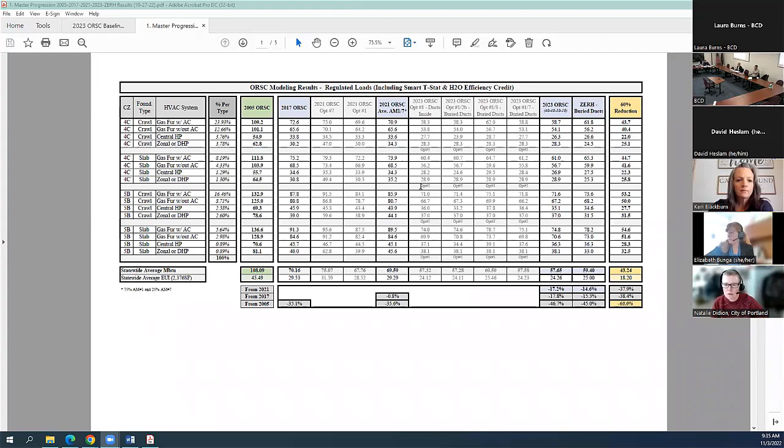That document, yes, if you could zoom in on that just a little bit to show our analysis of the models that we looked at for the progression of the code and sort of where we started from, for the 2021 code, and the agreements we've had on how we would look at modeling and looking at average energy use.

For the 2021 code, we modeled, just real quick to go through this, both looking at option 7, which was the Windows piece that is being deleted from the 2023 code. Results were significantly worse than that for the 2021 code using option 1. We developed an average result based upon an agreed upon weighting that we've talked with energy stakeholders on, assuming that 25% of homes might use option 7 and the remaining 75% wouldn't. So we came up with a result at the very bottom.

I know this might be hard for some people to see, is a statewide average regulated energy use of 69.59 MMBTUs per year for that home, for the regulated load. For the 2023 code, since we are moving, well A, getting rid of the option, and B, we're looking at moving ducts inside as one path, or still allowing deeply buried ducts to continue to be used, but requiring that second additional measure, we have on the screen showing 4 different potential options. The first one, of course, is just the standard home if the ducts were inside. The second, third, and fourth options are looking at 3 different potential variations of using an additional measure.

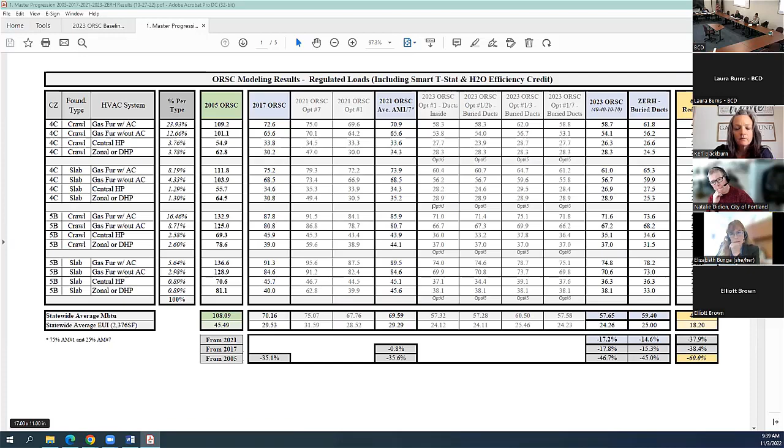There are things we get some additional credit for here in Oregon, just simply the 2017 version. We've had some additional pieces that came with doing this that get us where we see a safety factor, using the assumptions we've stated. I've had that spreadsheet available for people to look at for what we assumed for that ZERH buried ducts path, what that target is, and what we're assuming based upon the current code and discussions we've had so far. If we go down a page on this...

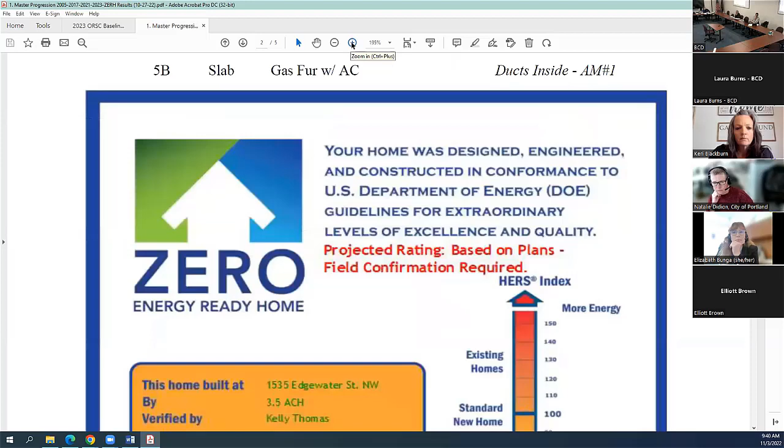Again, using REM rate, that is the software we've been using for the residential path. We can zoom in just a little bit on this. Pretty much all of them came out—actually, we've looked at even the worst case homes from the MMBTUs of the energy modeling of the different options, and when plugging in, they give you a 0 into REM rate, which is used for the Zero Energy Ready Home program. It will give you a passing score, including a HERS score, which we'll show as well.

If you scroll down a little bit more, to do the Zero Energy Ready Home program there are things done outside of what's in the building code. If you're actually going for full certification, you would do things for the Safer Living program, and additional indoor air quality items you might do if going through this Zero Energy Ready Home program. But from an energy standpoint, you take what is in the 2023 code. Every one of the ones we looked at will show that it's ready for the Zero Energy Ready Home program. If you want to scroll down a couple more pages, we can show some more that we did.

Zoom out a little bit—this one is for, and the one point of the Zero Energy Ready Home program outputs that I want to note for everyone is that REM-rate doesn't have an additional checkbox that would allow us to model a smart thermostat.

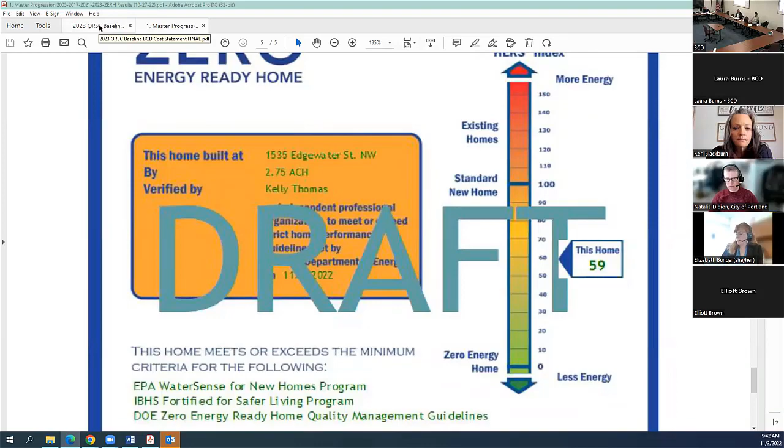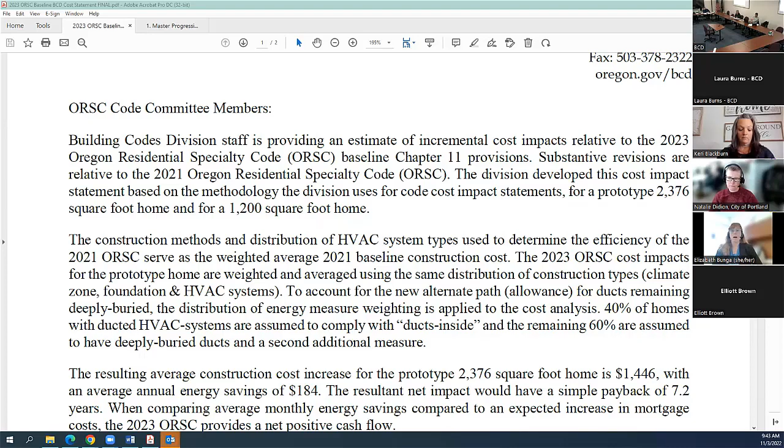Laura, if you could bring up the other sheet, this is our preliminary look, excuse me, it's not on current letterhead, at the expected cost implications of how we come up with the average cost expected statewide and the average energy savings statewide. The previous spreadsheet you saw is used to develop the average annual energy savings. We then take a look at what's involved in achieving the 2023 energy code, using the same assumptions used to develop the 2021 efficiency level, and identify the changes involved. We do a weighted average applying the expected cost to go from the 2021 to the 2023 code.

We have a general summary statement here. We're going to do a little more work on the 1,200 square foot home to really verify that when you change home size everything works out exactly correct. But we have good numbers for the 2,376 square foot prototype home.

All right. Thank you, Laura.

The average statewide cost increase impact would be about $1,446, and would return an average energy savings of $184 per year. Now those are using current costs, the best things we have available, and since we began this work and set up our standard for the numbers we'd use, we've seen an increase in the cost of energy as well. Next code cycle we'll have different numbers to reflect that. But the resultant net impact would probably be a simple payback of 7.2 years.

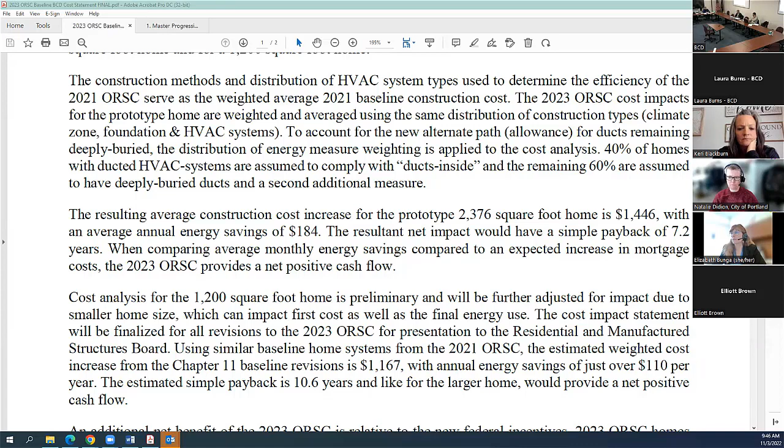But we want to make sure we've got all our ducks in a row on that one before we go to the board. Again, the 1,200 square foot figure is primarily for use of the RMSB in making their final determination. The final price included in that would include all of the revisions you'll be looking at, not just Chapter 11, but this specifically tells you about the Chapter 11 revisions.

If you can scroll down a little more, Laura, I want to point out that when you're building to the 2023 Oregon Residential Specialty Code and you produce a HERS report showing you're ZERH ready, you can also get Energy Star ready since that's even less restrictive. Reminder that there will be $2,500 incentives for homes meeting the Energy Star program and $5,000 if you do all the steps required for the Zero Energy Ready Home program.

So for those going through those steps, the 2023 code could on average give you a net positive savings if there's $1,000 to $2,000, depending on if there's $1,000 associated with getting your Energy Star certificate. The average is going to be a net positive possibly. Again, all of this is based on averages, and your mileage may vary.

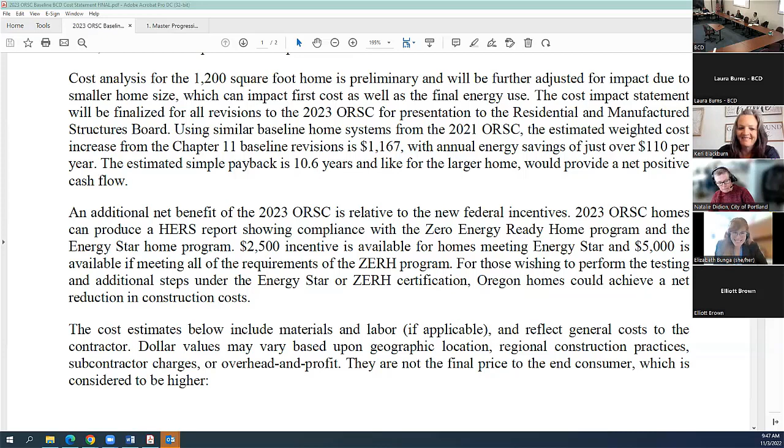Batteries are not included. Items in rear view mirror may be closer than they appear. We just can't say all of them.

Things are averages. The range of costs can, of course, depend on where you are and on using the prior code. We have further detail in the report, which we'll post online, looking at how we got to our costs. For the water heater issue, we rechecked numbers this week to see what it would cost for the equipment, the cost difference, and there's further explanation later on what we looked at for the impacts of using an improved water heater.

Have some minor differences, but come up fairly close to what was done in one of the other reports included. So it's in the $900 to $1,000 range based on what we're seeing. But of course, that would be an average statewide, depending on where the water heaters are located and different savings that come with each one.

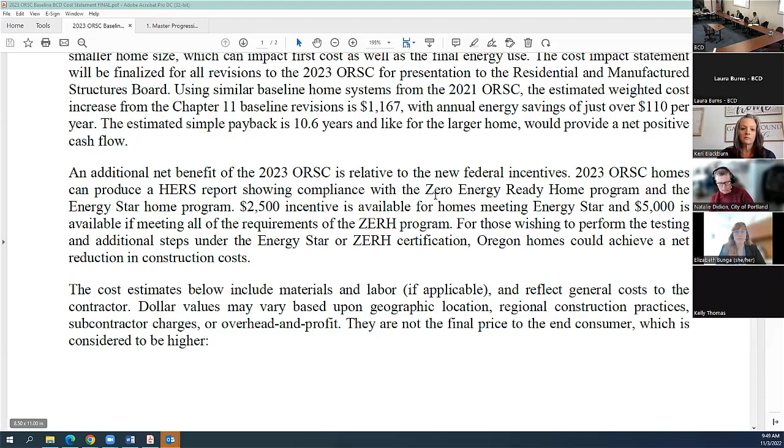So moving forward, if there aren't any questions at this time, we've had a request to do some of the more complicated items a little later. One of our proponents isn't available, so we started off with something a little slower and easier. As everybody's coffee is slowly working its way through, we'll begin with the proposals related to the Windows program sections that begin with NF.

And we can look at the proposal NF 113 first to see what's relevant. I need to find my documents, of course. You want to bring that one up, Laura? We are at, next to the last, we're down at this one - it will be NF 1113, insulating glass certification.

The proponent would like to come up. We've noted that this is really a look at cleaning up language about how you can get an accredited insulated window. A little more background - this information is for windows that don't have an NFRC certification on them. So through some legislation dating back a long time, we have methods for small window manufacturers to build windows and be able to sell them in the state.

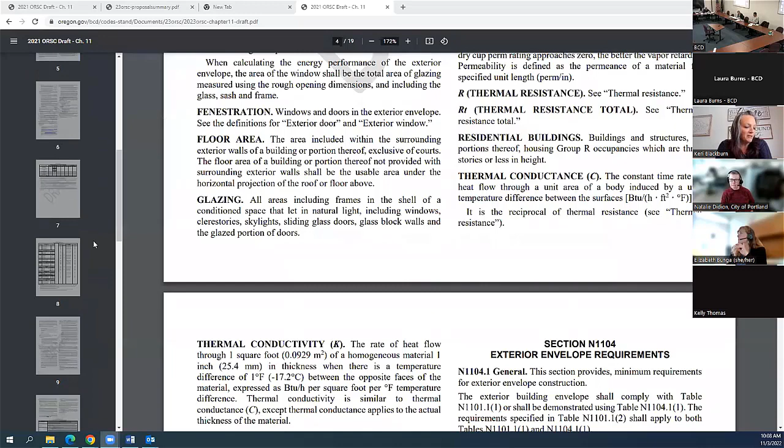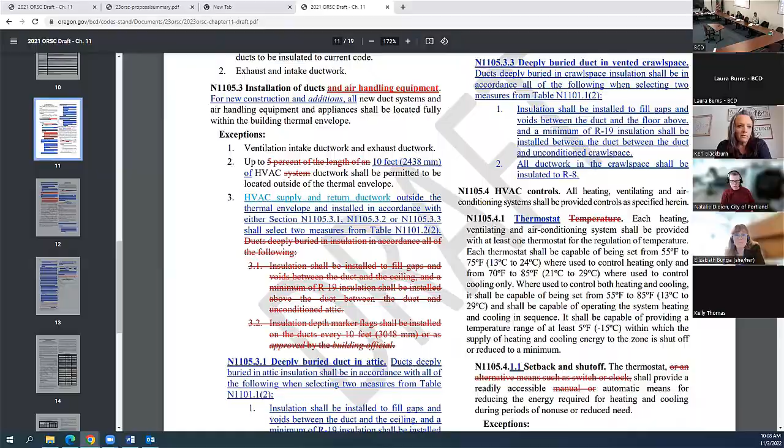And then, I know I mentioned it last time too, the option of the ducts in the unvented crawl space outside of the thermal envelope, having that wall insulation in there. I think there'll be some confusion, because the way I understand it, if you have the crawl insulated and mechanically ventilated per 408.3, that would be considered in the thermal envelope, and they wouldn't need that second energy measure. That's it on N1105.3.2 for the proposal, number 3. I just think there'll be some confusion applying that.

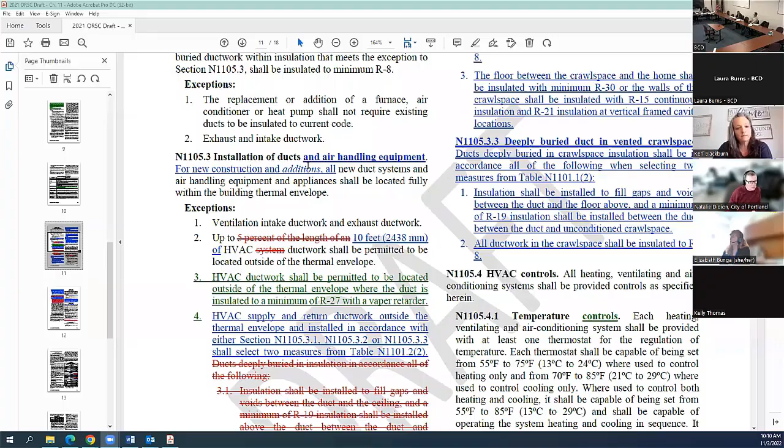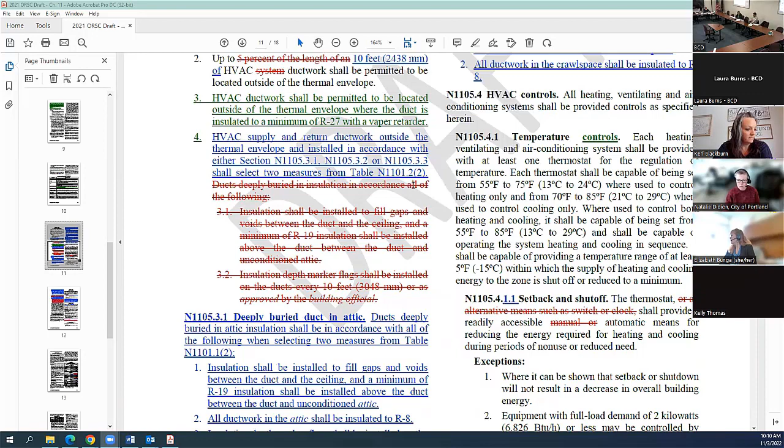I understand on that one, and I think the correction would be if it shouldn't say 'or walls are insulated,' because that does turn it to inside the thermal envelope. So part 3 of N1105.3.2, the intent was to show that if there is a path to do an unvented crawl space where the thermal envelope barrier is at the floor line. This is intended to show what would happen if you had the insulation at the floor line, and the second part is showing, yes, where it would be inside the thermal envelope. That is a good catch.

And then I had one other thought, sorry to have so much. I thought the beginning of each of those exceptions, the ducts deeply buried and the ducts in the unvented crawl space, that says 'when selecting two measures from table N1101.1(2),' that's a little confusing to me. That almost makes it sound like that's an option, but it says previously that if you use one of those options, then you have to select a second energy measure. I don't know, does that sound weird to anyone else?

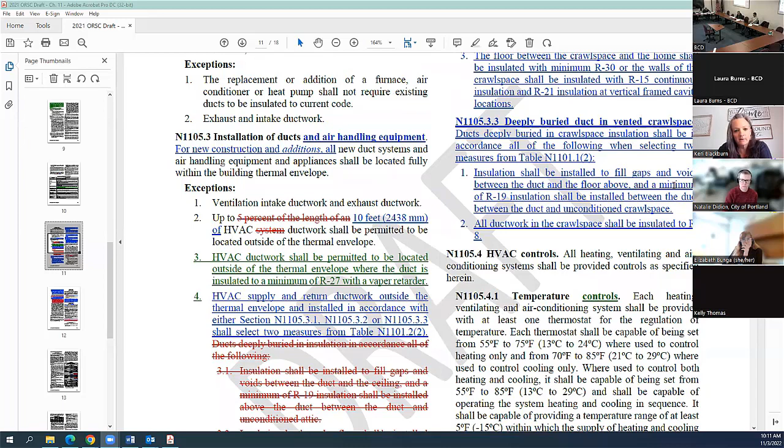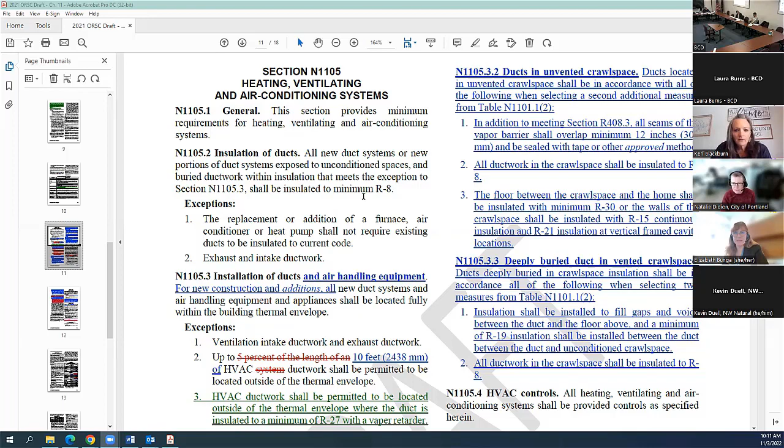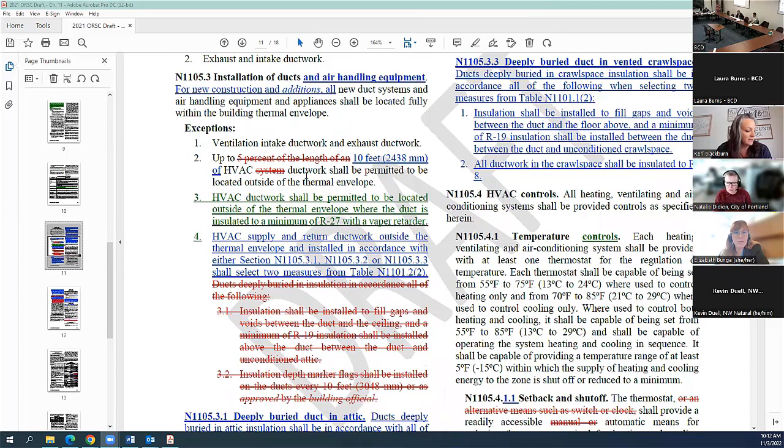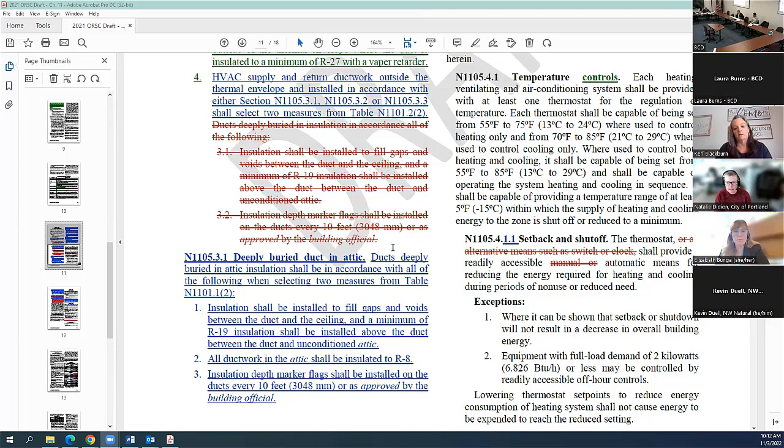Okay, I agree that it becomes, the general understanding is that it becomes redundant and potentially confusing language because it almost sounds optional. I agree, Keri, I don't see where the new language when providing two... Maybe I need to, it's under each of those, N1105.3.1, that first paragraph. When it talks about ducts deeply buried shall be in accordance with all of the following when selecting two measures from table N11... And then it says that on each of those deep buried and ducts in the unvented crawl option, whereas in exception 4 above it says they shall select two measures. So, right, yeah, agreed, thank you. I agree too, good catch.

I can propose a revision would be, instead of saying 'when using exception 4 of N1105.3,' that would be better. Yes, and it might wind up actually being exception 3 once we look at the language. And while we're on this, exception 3 says 'vapor retarder,' but it's spelled like someone using a vape pen. VAPOR would be the correct spelling.

So, Laura, you want to try? And I'll be mulling in the meantime while Laura's doing some work, to look at what to do for that exception number 3.

Just general observation, I'm not a plan reviewer, but this whole area seems very complex to me. So maybe do the first initial cleanup and get this back to the plan reviewers on the call. This is going to be useful now for my plan reviews. I mean, that's what we're trying to accomplish here, right?

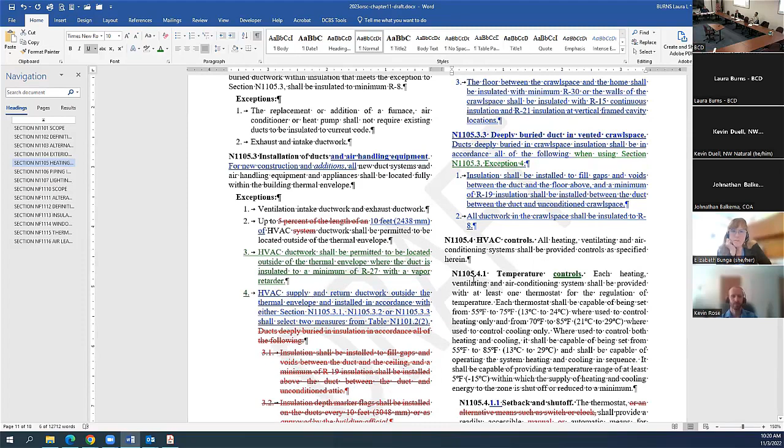Yeah, take a look. So the green on that is showing that at each one of those charging statements, instead of saying two measures, they all go back to - if you'll see on the left side of the screen - that they're all referring back to exception 4.

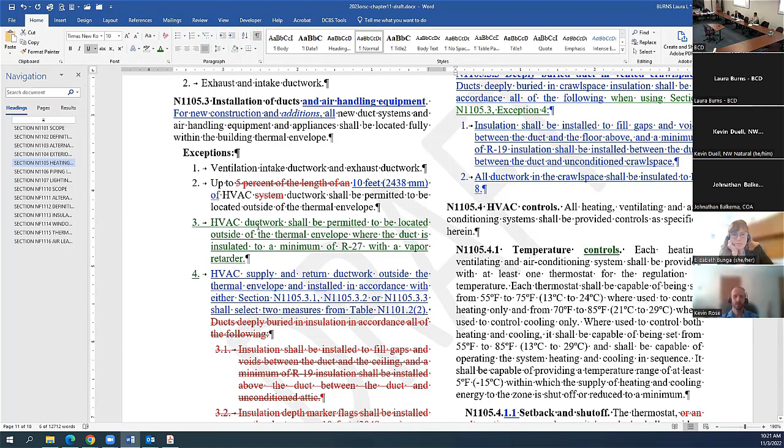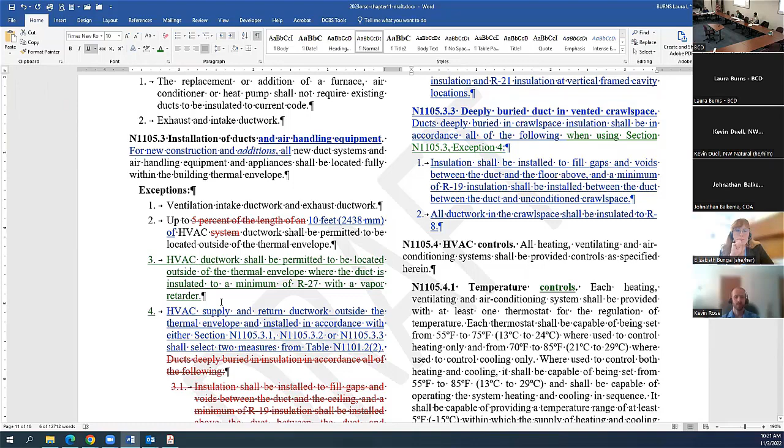Then we have to look at really the intent, the vision understanding of the intent, and I'm glad this was caught, was that exception 3 would really be a subpart to exception 4, and I'm going to put this out as a general statement of my understanding: deeply buried ducts may be insulated with R27 insulation and vapor retarder in lieu of R19 cover over R8 ductwork. I think that was the intent of the group, last go around. That was my understanding of it, was that this was an alternate - oh, that's true - duct. So it could either be a subpart of 4 or it becomes a subpart of 3.1 and 3.3.

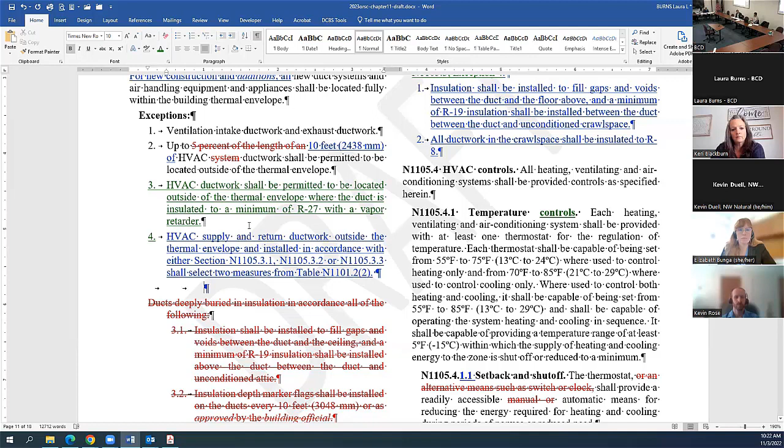Yeah, that's true. And since it's not actually within the thermal envelope, you'd still have to pick 2 measures, right? Correct. So it needs to fall under that category. Right.

And looking at this a little closer, there's a wording I think that would make the vapor barrier issue perhaps cleaner. Something like where the duct is encased in R27 insulation with a vapor retarder. But that's perhaps mincing words. I think we had encased, and I think we changed it to insulated. We had some other word than that. Fair enough. We moved back to insulated.

And David's put a piece in the chat about adding a vapor retarder of 0.1 perm or greater, just to be clear. Sorry, should be perm. Oh, terrible, you're right. Yes, for permeability, yeah. That would just eliminate somebody using Visqueen, which would be a thing that would trap moisture.

We have other code sections that discuss what is a vapor retarder versus a barrier - the definition. There are 3 classes. You might want to look at the definition. There's 3 classes of vapor retarders, and class 1, Visqueen is part of that. Class 1 is 0.1 perm or less, so class 1 is actually vapor barriers, but they're still called a vapor retarder. Class 2 and 3 are above 0.1 perms. I don't know if the definition gets into those 3 different classes or not, but what divides it is the perm rating.

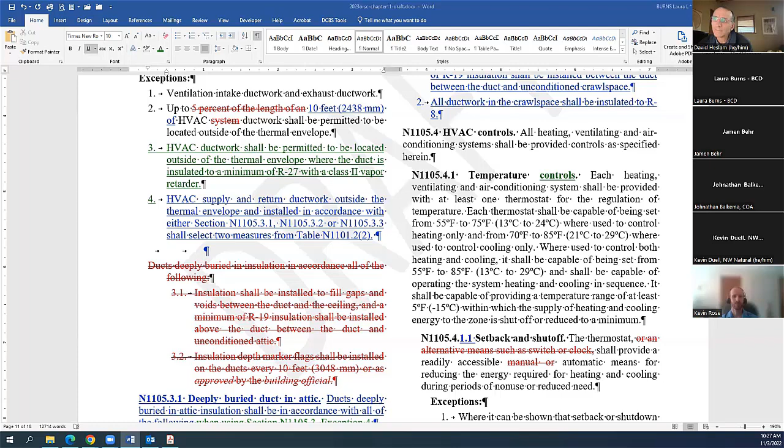So I just want the code to be a little more clear, so it's not so open to interpretation. Well, here's an easy way to address that - I don't want to seem adversarial, but don't use that provision, use the deeply buried one instead. If you're having trouble with your local building department, it seems pretty clear to me. At least for us, we enforce the language of the code, which is you can put it anywhere as long as it's R27 and you wrap it in a vapor retarder. So you come and show me that you did that, and that's what you're going to get approved as.

So you said visqueen, but I thought it was - or not visqueen, but a vapor retarder, sorry. Yes, vapor retarder. I mean, is it not just okay enough that this is one exception among other options, many options?

No, and I appreciate the flexibility that is beneficial to everyone. It just - I don't know, I look at it and I see it's going to be a very confusing issue if we choose that path, something that would require a lot of discussion with a lot of different building officials in a lot of counties and cities. I don't know.

Seems very vague. You must work in a lot of unflexible jurisdictions. We do - I've been doing this for a long time, trust me, and I don't see any struggle in the way the language is worded in reality, from a building official standpoint.

It's: did you insulate it? How are you going to insulate it? And are you putting a vapor retarder on there? The most question you may get is, 'hey, that's not the kraft face - what vapor retarder are you using to make sure it's now a class 2 or class 3?' That seems like your discussion points. It's not going to be as challenging as I think you're trying to make it out to be.

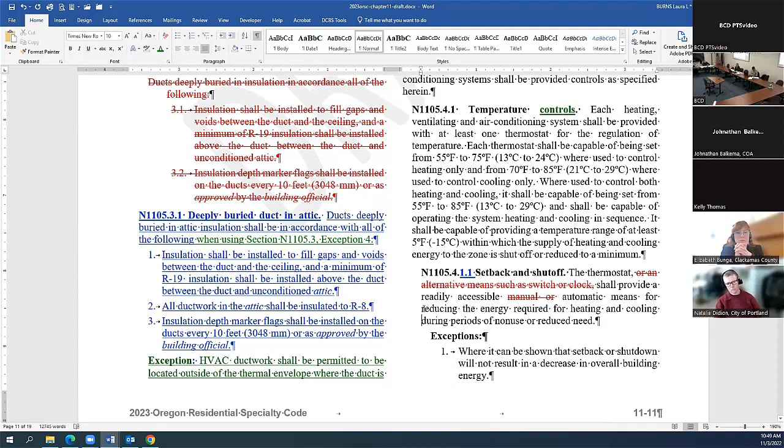We took the language as said, when HVAC ductwork shall be permitted to be located outside the thermal envelope where the duct is insulated to a minimum of R27 with a minimum class. So we should make that minimum class 2 vapor retarder. There are other ways to say that, in lieu of R8 duct insulation buried in R19. But that is the intent we got from the conversations we've had today trying to see if we have some.

Under 3.2, oh, we have one other item under item 3, Laura. Scroll up a little bit. Part 3, we were going to scratch from the end of our minimum R30, put a period there and delete everything after that, because that ductwork does actually wind up inside the thermal envelope. That was the intent we got from that. And then there's a repeat once again for when using exception number 4. So those are our different.

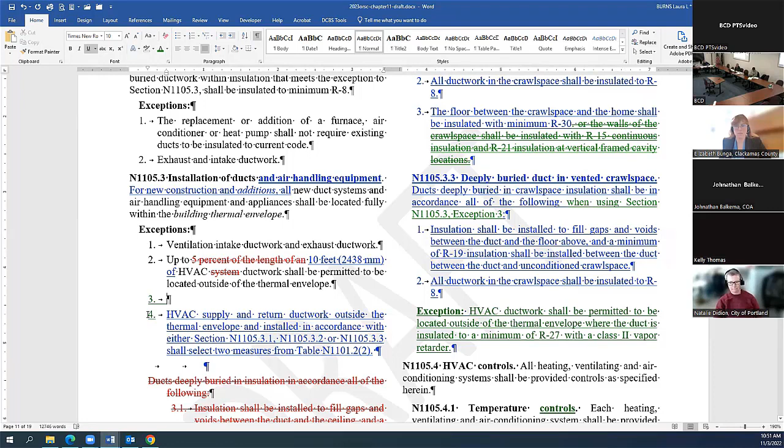Will it now be exception number 3 though? Yeah. Oh, you got it as 3. Okay.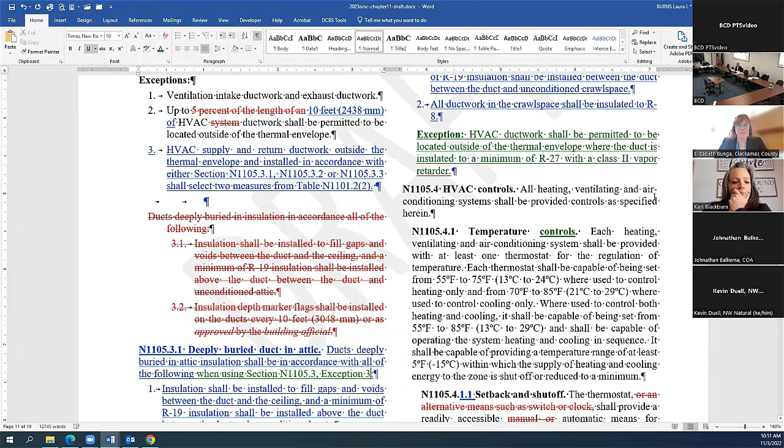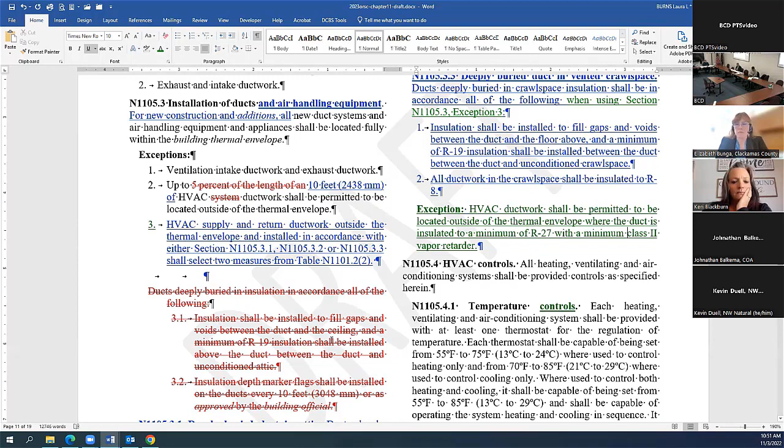And that last exception should be minimum class 2 again. There we go. And that is used for vapor retarders for, I believe, when it's walls. I think it's wall painting or ceiling painting, I forget which one. But there's another - I thought we were going to get rid of the word minimum.

This is Rex. I think the discussion was, is there 2 options of classes that would accomplish this? Instead of saying minimum, maybe it's a class 2. Is there 3 classes? We either have to say class 1 or class 2, or class 3. Somebody mentioned that the word minimum, I might not know if a 1 is better than a 3, for example. Just for clarity, they brought it up. I would just do class 2 and class 3, and that way it's just clear.

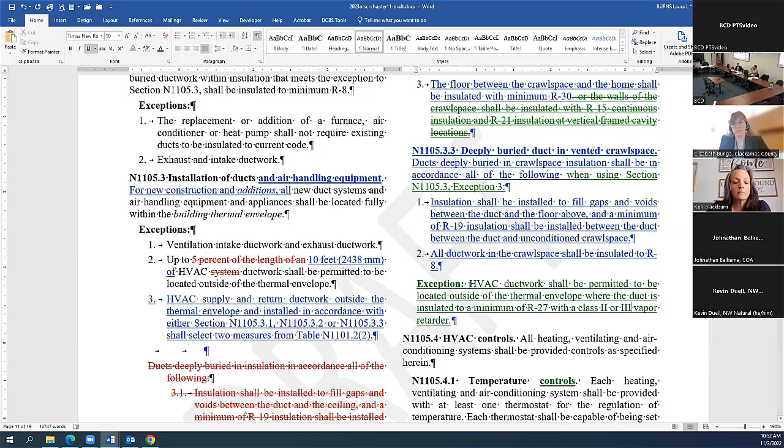Right, spell it out. The location, I would prefer flexibility on, because Mark gave a good example, and I think that would be a great solution of using say an R15, have your vapor retarder there, and then another R15 type thing to achieve your minimum R27. So I still like it loose, so that way it's flexible for what the builders may want to do. Yeah, definitely.

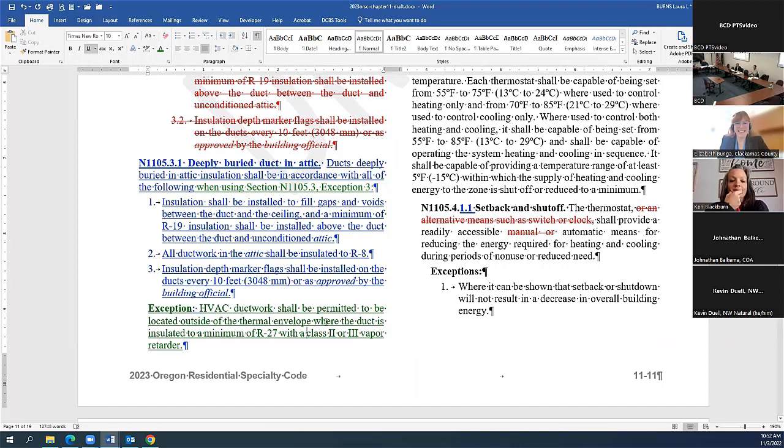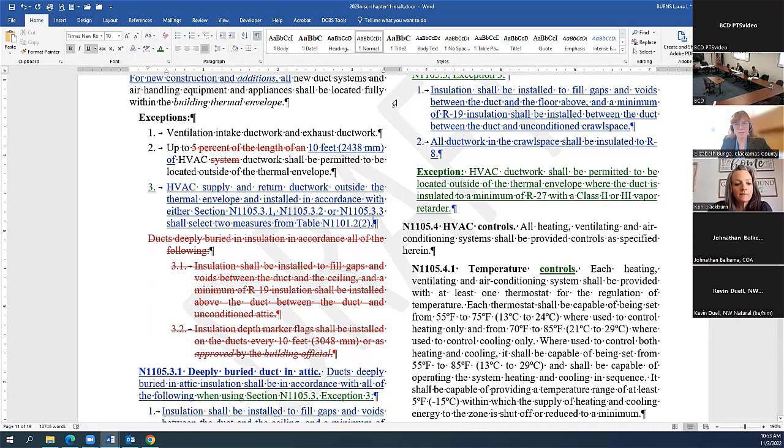Should class, just to totally pick this to death, should class be capitalized? There you go. This is technical writing, not grammatically correct writing. So we have general agreement that this cleans up the language and gets the intent of what was discussed at last meeting. Yes. Love it. Thank you, Keri, for bringing this to our attention and everyone's input.

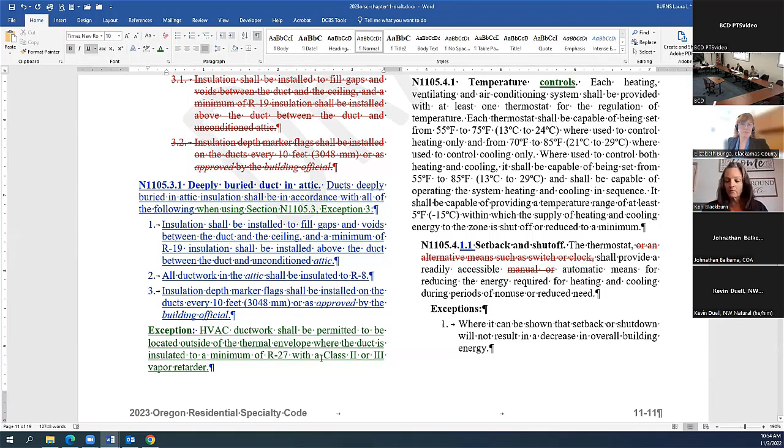With that, were there any other items people may have found when looking through the green? Of course, you could bring up if you find other items in future meetings. You have a lot more to go, but we'll try and get energy wrapped up today. Well, these are quick: Table N1101.2(2) additional measures.

Yes, Kevin? So I did withdraw my proposal, which would have left option or measure 2, all those green language changes would not happen. In other words, option B would be upgraded to UEF, but the rest would just remain as it was, because the committee pointed out that all that really did was remove options that were there.

Oh, you just brought something to my attention that we would need to correct on item A. Oh, yeah. Oh, wait a minute. Oh, never mind. We got rid of regardless of gallon. There we go.

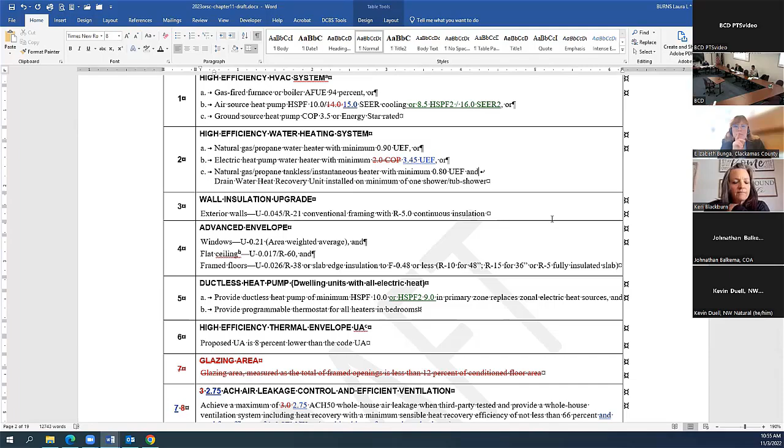Excellent. And then likewise in the additions table, small table 1101.3.2, we agreed to change number 6 from 92% to 94%. And we need to update the matrix on that, it's shown as disapprove. Yeah, same for the table above, that was shown as approved in the matrix.

That's what I had. All right.

We ready to really dive in and go back to the order we had on code review now? Looking at... try and find the PP number. Ninety-two.

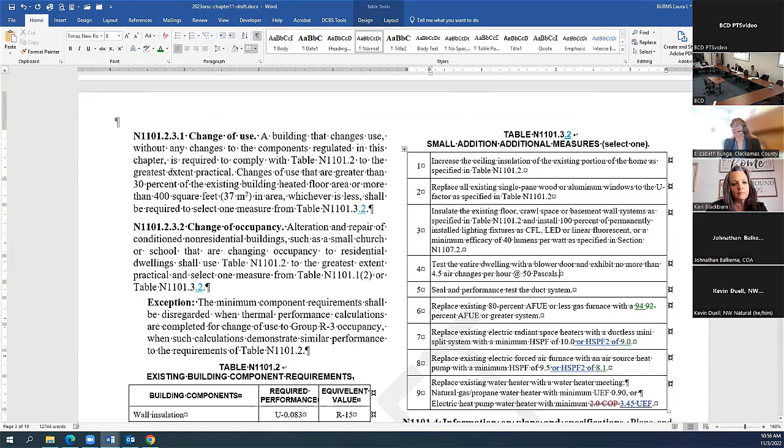Would you like to have another easy one? One thing we've noted is that the PP7 and the proponent would like to also have that discussion at the same time as the O9 options, which are PP23, 24, as well as the additional efficiency credits, PP27. They're sort of all going to need common discussion. So would like to maybe get a few of the remaining, maybe simpler ones out of the way, if that's acceptable with the committee. I agree. Sure, sounds great.

And one for N1106.2, PP21, looking to bring in the reach code references to the WE Stand plumbing code. In the analysis, the efficiency measures that are in the WE Stand have really been adopted by the plumbing board into the specialty plumbing code. From a general standpoint, our analysis is that the remainder of the WE Stand is really just installation standards, and those are part of what the plumbing board is going to do for how you do a gray water system and pieces like that, that are outside the scope of the building code. So, I appreciate, as a maker of that proposal, I appreciate that analysis, Mark, and thank you and the committee for your time, and I'll withdraw that proposal.

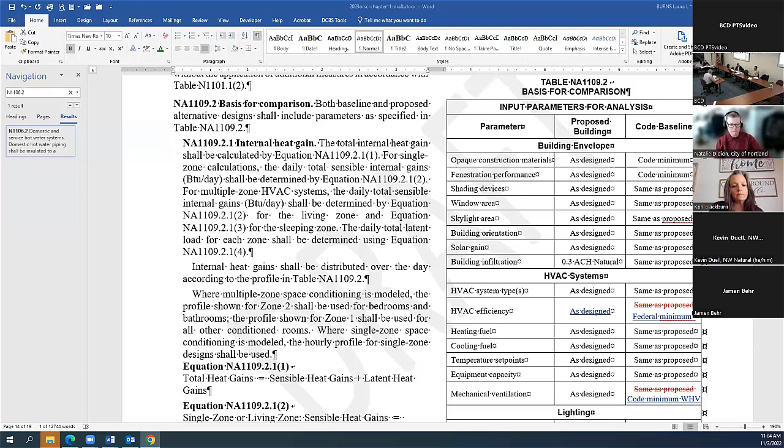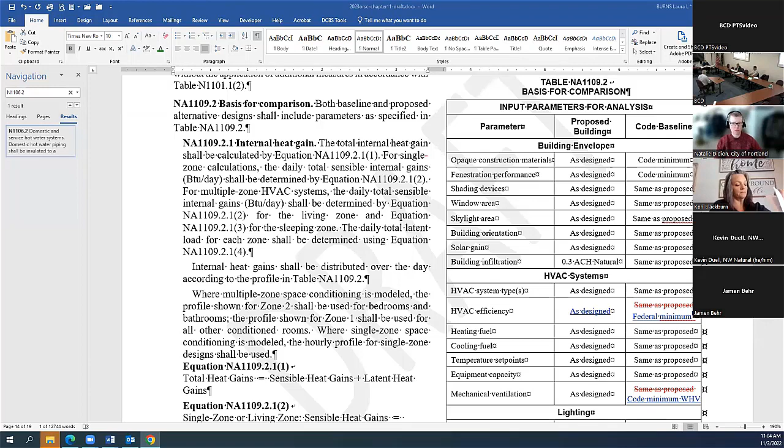Any other questions from the group? We have a general okay on this one, so we can move to the meat of the day.

So now let's move to, and I'm looking at our order, was to go back to PP7, correct? Is it numbered differently on the other one, Laura? That from your review matrix, PP7, Kevin Rose from NEEA.

Trying to find my worksheet on this. You'll have to forgive me here. Okay, I found my right one.

So I'm going to bring this up. It is for a request that table N, or the requirements for additional measures, go from one additional measure to two. If this went, it also would require that if you were going with the exception for ducts outside, that would then require three measures. So if the proponent would like to go through this, I think it's time for in-depth discussion now.

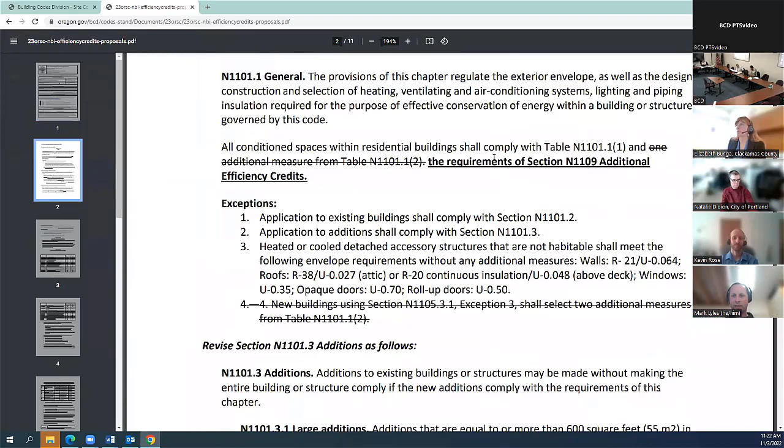Thank you, Chair, and thanks to the committee for considering this proposal. I was a little late to this meeting, so I'm not sure what all has been discussed in the lead up. I know Kevin just presented the one he worked on with NEEA, which was more in the vein of how the current code is structured here in Oregon, relying on selecting a number or selecting from packages.

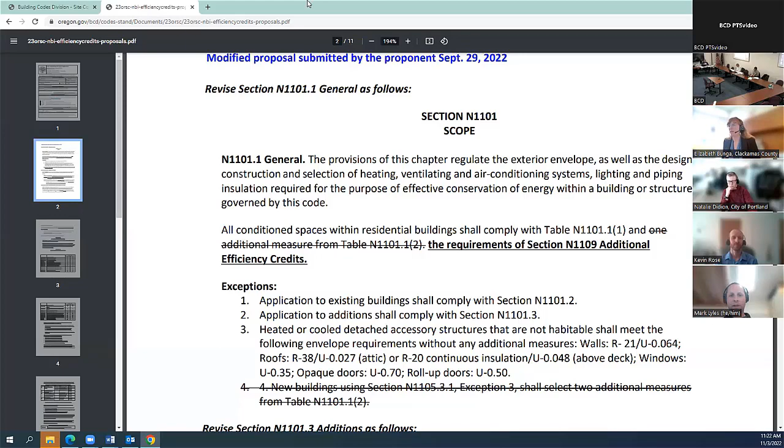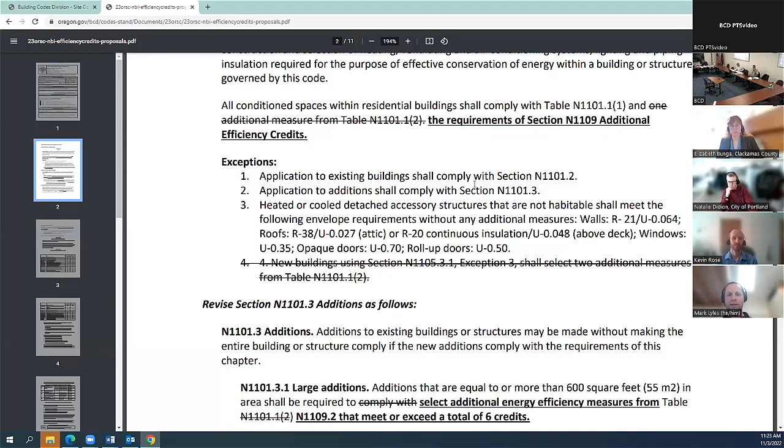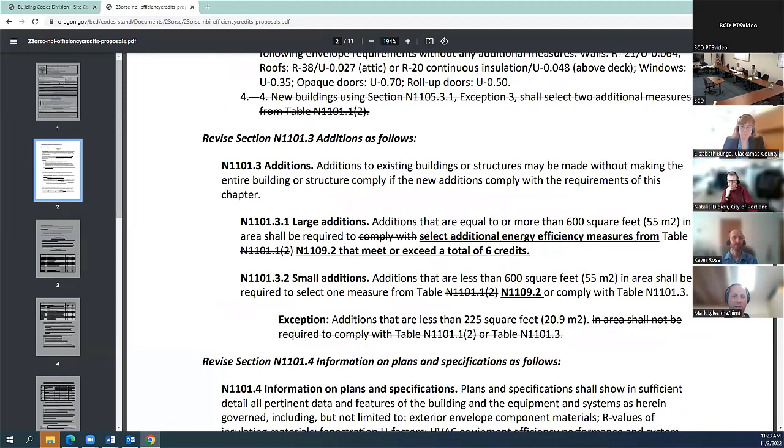What this proposal does is go from the package approach to creating a number of discrete measures calibrated to energy savings. It requires homes to get a certain number of credits in total, selected from a table, to meet a certain number of total points equivalent to a certain percentage of energy savings. The proposal moves this section to a new section at the end of the code. If you want to scroll down there, let me just talk through the table here.

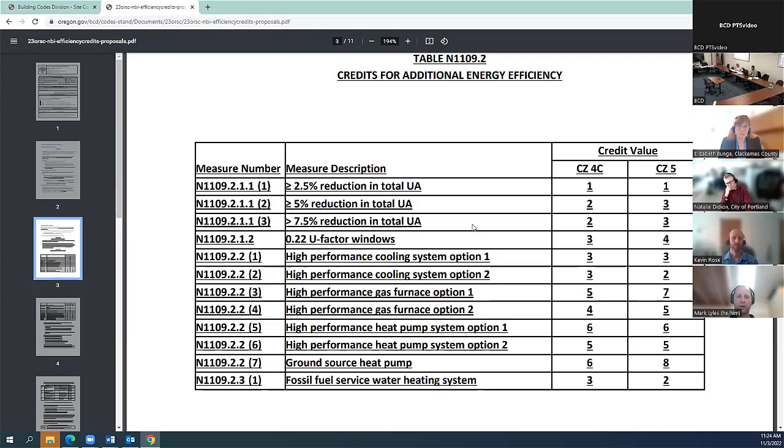So instead of having a series of packages with various degrees of savings associated with them, this proposal requires homes to select a total of 10 credits from this table. This gives builders a great degree of flexibility to select the options that make the most sense for their projects. There's envelope options, equipment options for space conditioning and hot water heating, lower air leakage rate plus HRV, ERVs.

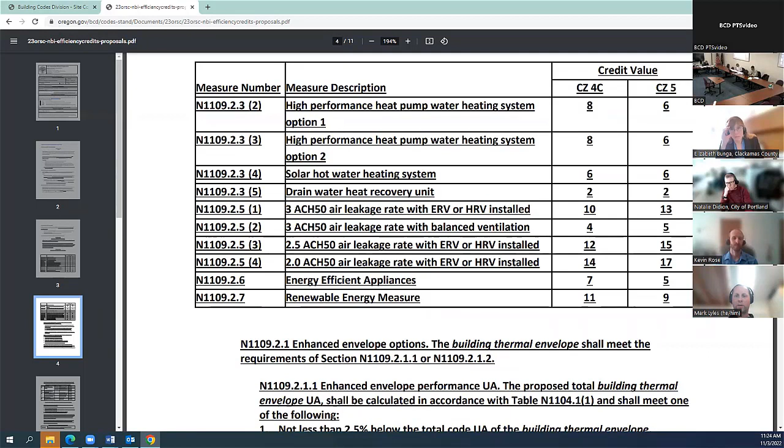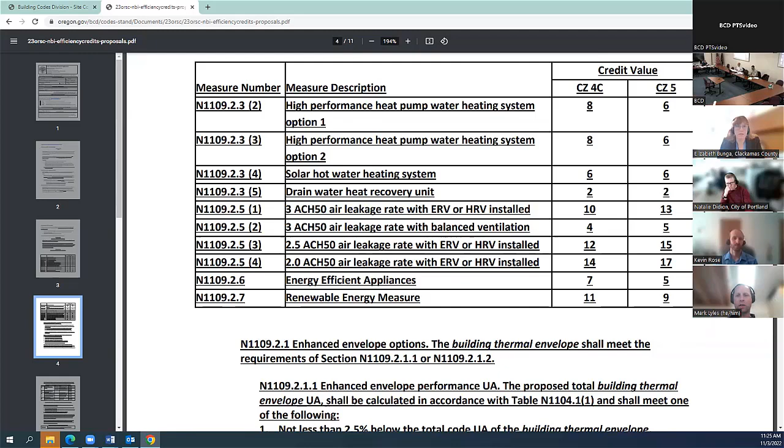There's an appliance option and a renewable energy option, and you can see for the different climate zones what those values are associated with. This proposal would require that projects or homes select any two measures from this table that would equate to 10 credits in total. You cannot satisfy the section of the code by just selecting one, you'd have to go with two at a minimum, in addition to getting the 10 credits. That roughly equates to about a 10% energy savings.

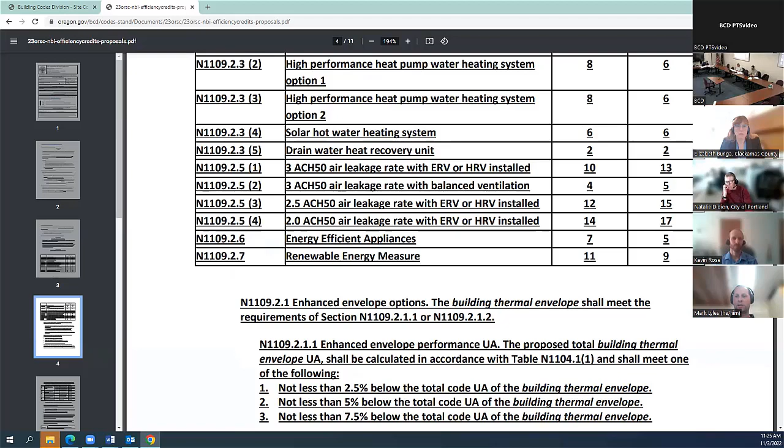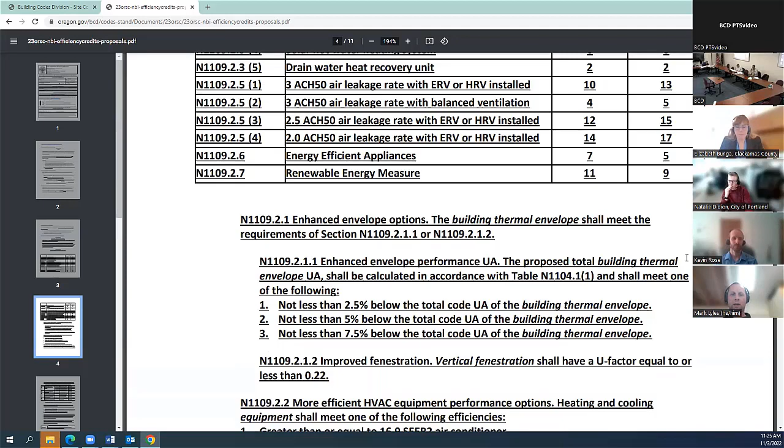We have been in discussions with BCD about setting that total threshold for the credits that would need to be achieved. Basically, whatever they did in terms of their final determination, if there was any calibration needed to make sure that total number of credits being set needed to be higher or lower in order to meet their goal, that would be accomplished at that time.

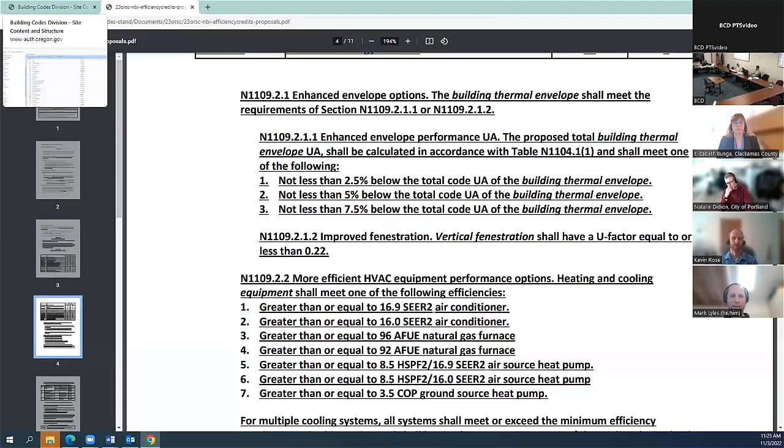So that is kind of the high level overview of this proposal. As you can see here, in terms of the efficiencies, it's generally in line with what was existing in the previous code, but really the main move here is to break it out and assign individual credits with each of the measures to better calibrate the savings.

Quick question, in the proposal original language, I'm seeing a 20 credit minimum, I think you just mentioned 10. I apologize for that. We are working at the model code level nationally with the IECC to get a similar proposal in, and that one was 10. This one, based on the analysis done by NEEA, we determined it would need to be 20 credits to meet the goal we had identified initially going into this proposal. But we are open to working with BCD to make sure that whatever that total value is the correct value based on their final determination.

This is Rex Turner. I think maybe you answered my question, I'm going to ask it a different way just to make sure. Is this the path, the direction our international code is taking currently, or is this leading edge stuff that we'd be doing in Oregon first? This is the direction the IECC code is going in. The public comment draft of the IECC 2024 was just published yesterday I believe, and a very similar proposal to this is in that public comment draft. So we're anticipating that something very similar to this will be published in the IECC 2024.

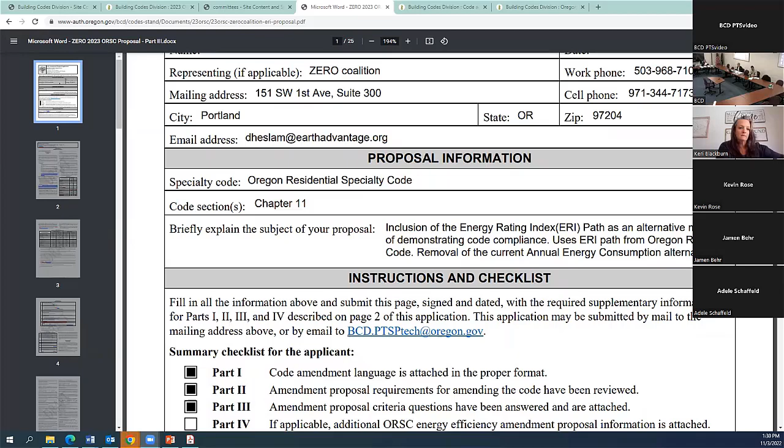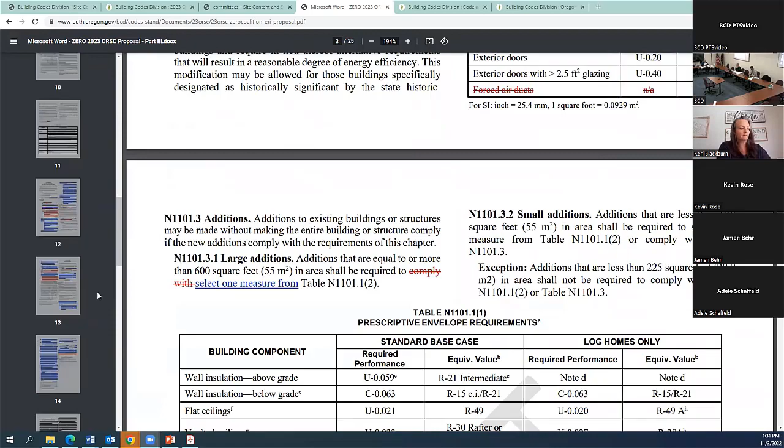Two measures putting forward, and you'll have to scroll way down on this to the very end to show the whole code. There's a proposal to get rid of the energy model. This is the one where from the Zero Coalition is to not have an energy modeling path, getting rid of 1109 and replacing it with the IECC ERI path, essentially HERS path.

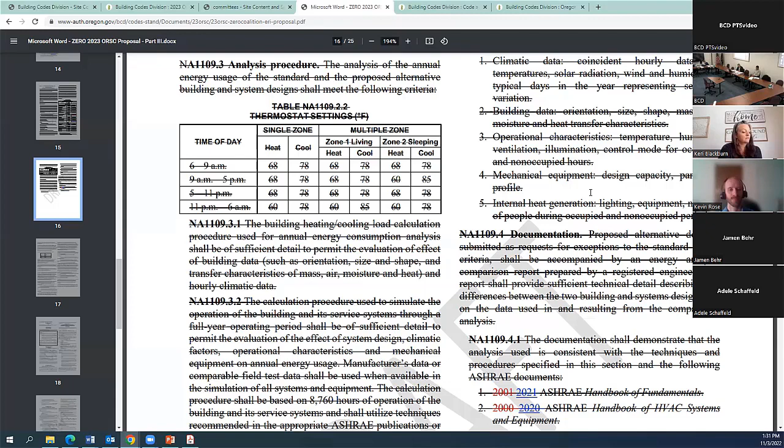And it sets a HERS number, and I'm trying to remember the differences between the two. I need to find my analyses here, but it sets a target score. Sorry, David, trying to find yours and get the right score. Yeah, it's 53 for zone 4 and 52 for zone 5.

We pulled the numbers from the reach code, the current reach code, where this is already adopted. And then there's a second proposal from Northwest Natural Gas that has numbers that appear to be reflecting the current IECC numbers. That's correct, yeah. The fun part about this is that the numbers flip. Their requirement is higher for different climate zones.

And we, of course, general comparison I'd like everyone to hear about is having an additional compliance path other than energy modeling, but would allow for some flexibility that could come with an ERI index or a HERS rating, which you could also, at the same time, if you are going this path, use that same HERS rating and print out a Zero Energy Ready Home certificate, or an Energy Star one, and start looking at the national incentives that are going to be available.

That's the general proposal from the Zero Coalition. I'm trying to remember if it's all the language from the IECC, I'm sorry, I don't recall. And the proposal from Northwest Natural Gas is just sort of a general 'get a HERS rating' or ERI rating. So if you'd like, I'll start with David to give a little more background on this.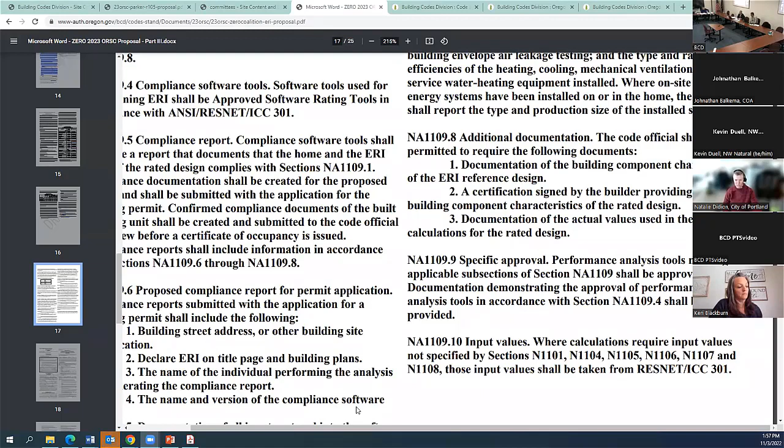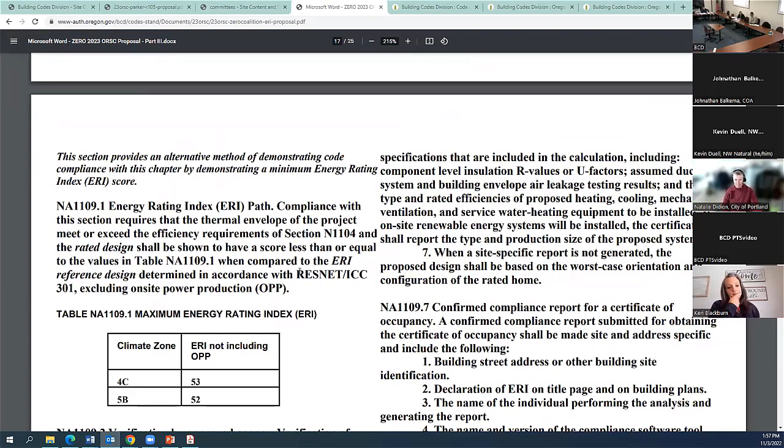Just a couple of words changed would make that more specific. And I'm happy to open that up for anyone to make suggestions on how that could be more specific. Jamin, can you point out what you're exactly talking about? So part 2, alternative system analysis, section NA 1109. There's the first statement, right above NA 1109.1.

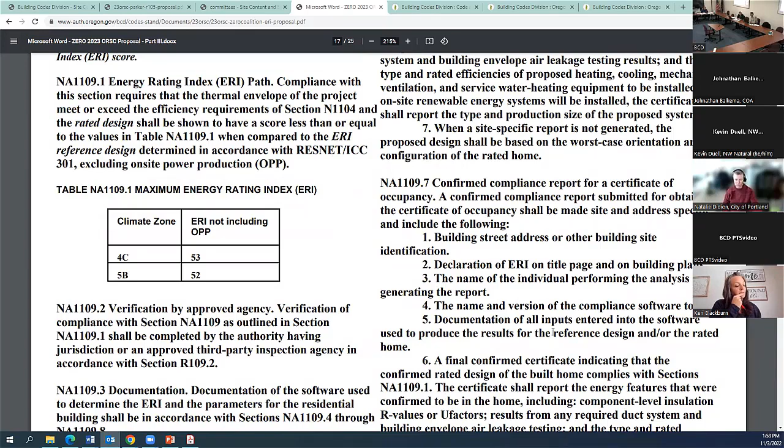I see. And the end of that sentence says that is in compliance with this chapter. But there's so many variations of compliance within this chapter throughout the various additional measures. And I would like to see if that's something that a builder wants to pursue, then they're going to have to present to a building official how they're going to establish that. I would like for that statement to be a little more specific, it needs to set more of a specific benchmark to meet or exceed.

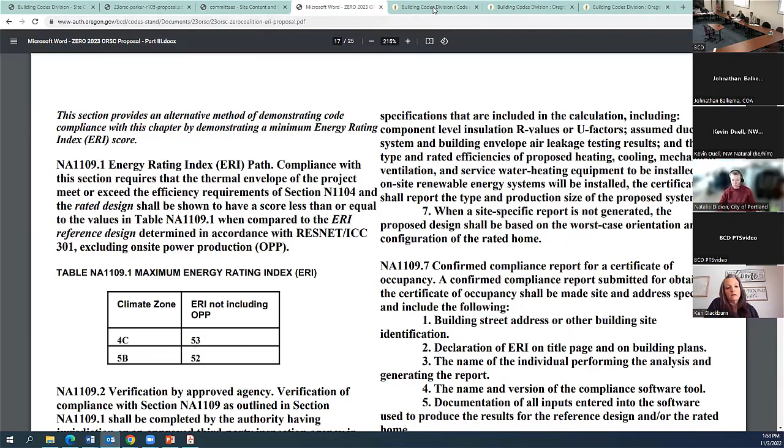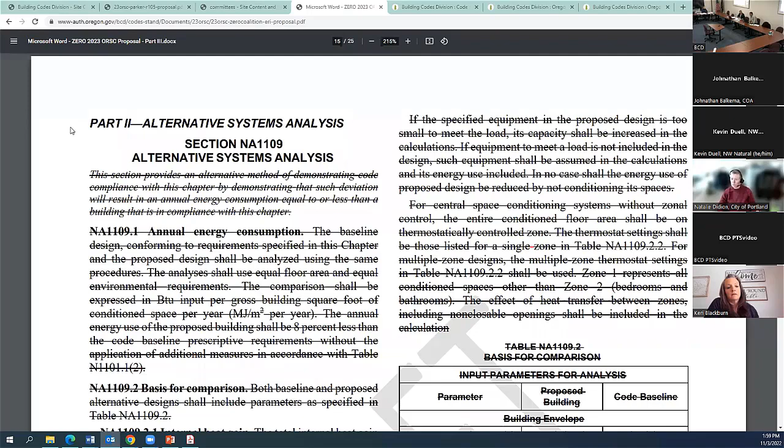I'm still not finding that language. Jamin, are you, sorry, this is David again responding as the proponent. The long sentence that is at the beginning of the old alternate method, that in our proposal was crossed out on page 15 of our proposal. Some of that language is retained and is at the beginning of our proposed language, which starts on page 17. Right, I see it right there.

And so we cut that down a little bit, and then in the very next section, 1109.1, is where we state that the efficiency requirements of section N 1104 have to be at least equal to table 1109.1. So it was really this first paragraph here was saying, hey, you have to do the minimum efficiency requirements of this path have to be the same as if you're just using the regular path where you meet minimum requirements and then add in the measures from the additional measures table. So this paragraph is trying to say, oh, you can't just cheat your way there by putting in a super duper efficient heat pump.

Imagine someday there's a, I don't know, 10,000% efficient heat energy machine or something. I don't know, but you can't do that. You still have to do all the basic energy efficiency stuff. And then your rated design has to be better and hit one of these two numbers provided in the table.

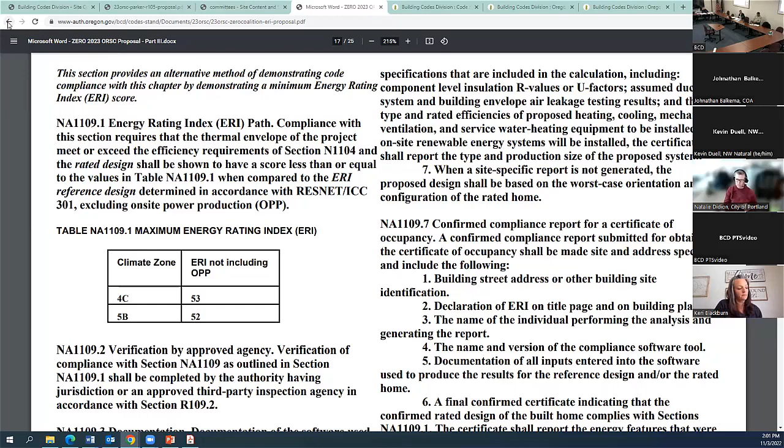I didn't notice that you had that line crossed out, so that pretty much answers my question. If this proposal is not accepted by the committee, then I would suggest that that first statement be altered, but that'll kind of be determined when everybody votes on it, I guess. I think it's a good point, though. That sentence, even as it's been revised, makes it look like this could replace the entire chapter.

And so maybe it needs clarification of what this is in lieu of, if it's just the energy measures, or if there's other pieces of chapter 11. It just says this section provides an alternative method of demonstrating code compliance with this chapter. So, seems like maybe we need to clarify that a little bit.

So from staff here, we're asking, this italicized language looks like an informative note, the way it's currently written, or is this the scope statement for NA1109? David: Well, I copy and pasted from what was already there in the alternate method and tried to make it relevant to this. So the only reason that italicized statement is there is because there was already an italicized statement in the part that we were recommending to delete.

I mean, even though the title alternate system would sort of assume that, I agree that people are going to think it's in lieu of.

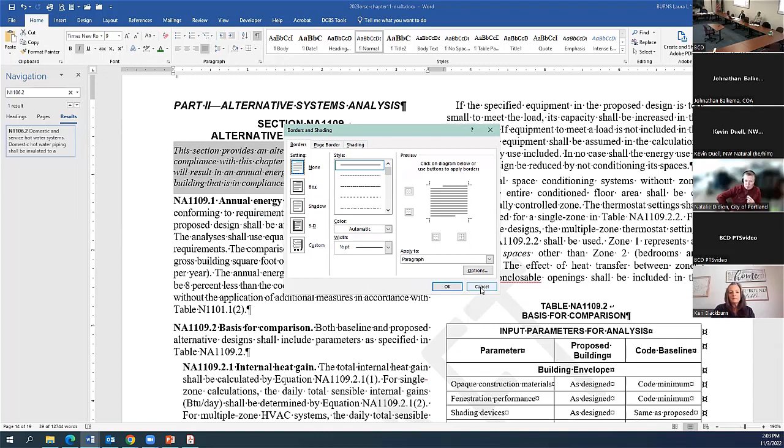Once, if I may, through the chair to the committee, one way that this might be dealt with is not in the italicized note, but in 1109.1, if in addition to N1104, section 1104, it might actually say section 1104, 5, 6, 7, 8, because 1104 is really the shell measures. But it doesn't take into account all the work that's been done on deeply buried ducts.

Right, like, so if you were to, and I would refer to staff on this, but if you were to enumerate in that sentence the additional sections that you didn't want to see this as an override to, then I would think one solution would be to enumerate those other sections.

And it's my understanding too that this italicized text is just explanatory, not actual code language, shall we say? Is that true? That's correct. In other words, buyer beware, move on to the non-italicized text.

I'm wondering too, has anyone ever proposed this NA 1109 in such a way that would violate code requirements elsewhere? Well, I guess it's never been used, so I'm all for replacing it. We've never used it either. The reason I was looking at it yesterday is just as an alternative to be more cost effective than doing additional measures, which just got voted down.

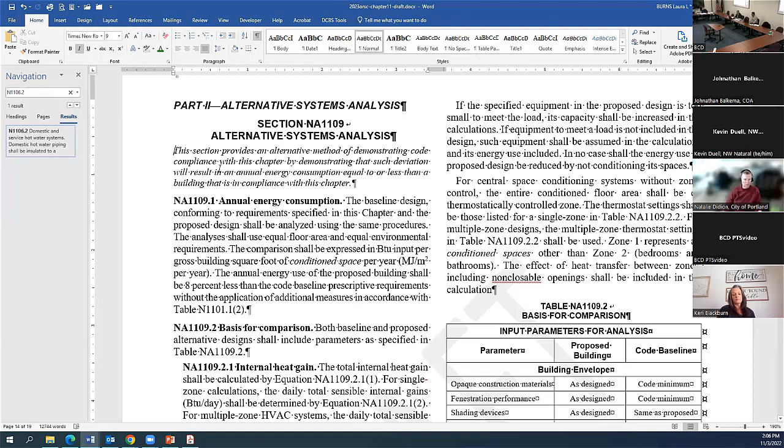Cool. And to be clear, that what we're looking at on the screen is not what we're talking about right now, right? Right. Okay. Proposal is to get rid of that verbiage, so if everyone votes yes, then it's kind of an irrelevant point. Right.

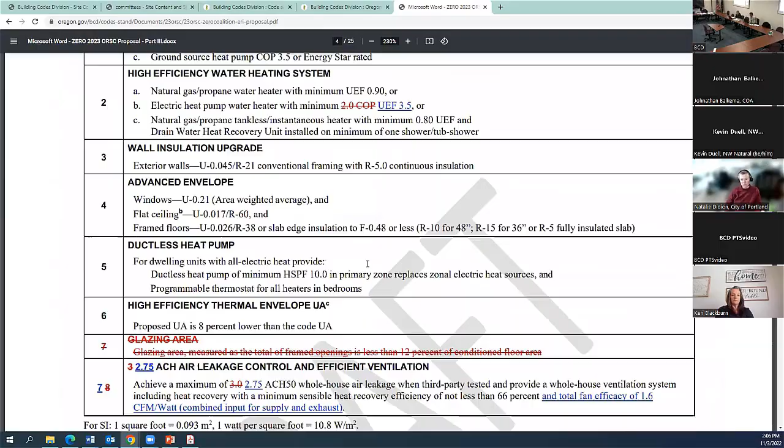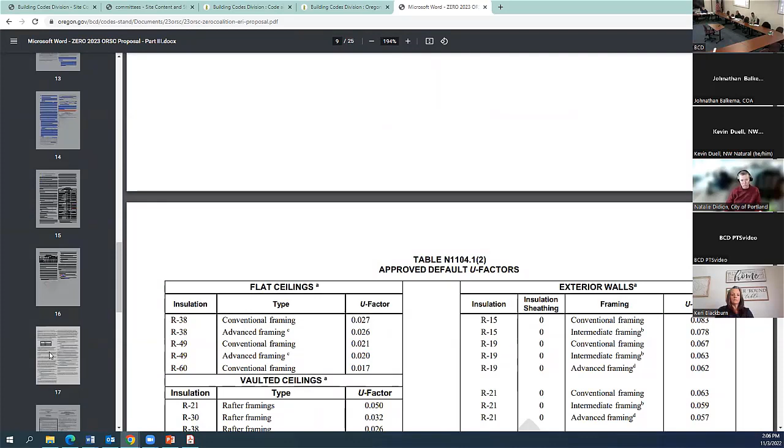And while we're scrolling to that point, in the IECC, what they have is a table of sort of, here are the things that you sort of minimally have to comply with. And the list is, you must meet the additional efficiency package, you must get a certificate from section 401.3, you must have the vapor retarder from R402.1.1. It's a fairly substantive laundry list.

And what we have here is really what's in the proposal is sort of to say, you need to make sure you meet the minimum envelope requirements. After that, what you get for your HERS rating is how you, it's up to you to get that. And would you get there without putting in the things that are in the minimum code? It makes it a little different.

And within the model code, the language you see in front of you in the italics are not quite what is the 2021 ORSC has a section, what would be the equivalent of NA 1109. Well, no, it starts with NA 1109.1 talking about the scope and then has a separate section on the compliance. Just from what I'm seeing of the model code, the language in italics would just be an informative note, and it's not applying to this at all.

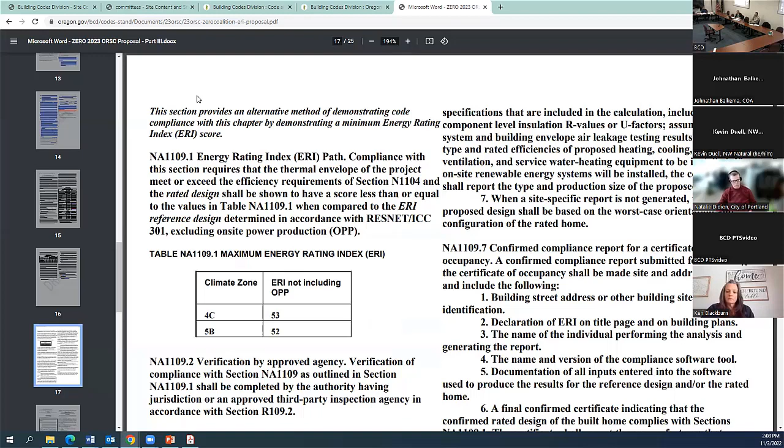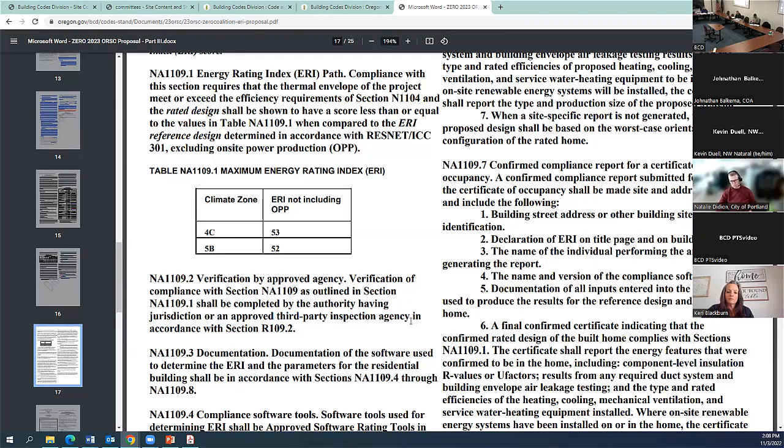So I think we've all been looking at this and saying, you currently have a proposal of looking at having, setting some bare minimums on envelopes. So don't go less than is required on the envelope and then hit a target that we can discuss in a minute. But I just wanted to give an update on that part, that there's a fairly substantive table that if you're looking to go past this current what's in section NA 1109.1 in front of you.

And if I may, Mark, and to the committee, hitting these numbers in the low 50s is pretty hard. That's sort of the original intent with setting these numbers in the low to mid 50s was to create something that you really had to get all the basics right first if you're ever going to get to these numbers, right? Like you can't have a lot of air leakage in your house and think that you're going to get down to these numbers as a for instance.

You pretty much have to, your shell is probably already going to be better than the IECC shell, and then you're going to add good equipment to it to hit these kind of numbers. So when they were first adopted into the IRC and the IECC back in 2015, they were set low to create like a safety factor between the prescriptive code and this type of modeled code. I think because people didn't trust people like me to model necessarily honestly all the time, so they wanted to have a safety factor built in if they were going to allow the modelers to be the ones verifying the code compliance.

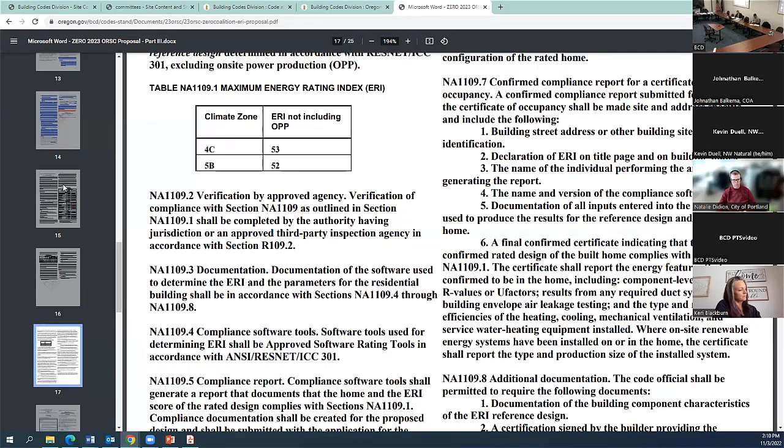And back on the subject of replacing this existing modeling option with this, I imagine if someone really wanted to do a modeled home, they could make an appeal or an alternative path request to the jurisdiction. Correct. Anybody can ask us to do an alternate method and show that it meets the same code requirements. So they could always bring it back. Good point, Kevin. Thank you.

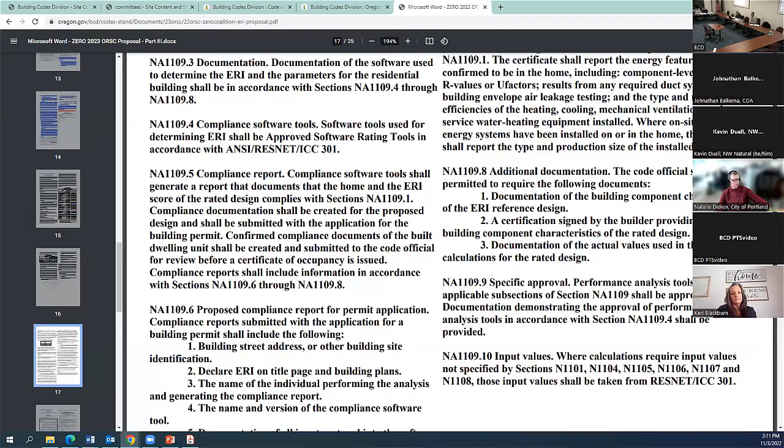All right, any other discussion or recommendations from the committee at this point? I think we've gone around on it.

This is Rex. I'm just sitting here thinking this comment is probably about two days late, but we haven't really talked much about the residential reach code. Maybe you can tell us what is the purpose of that? When can you cherry pick out of it, or are you all in or all out if you use the reach code? I mean, some of this stuff maybe should go there instead of in the base code. You got any thoughts on that?

Rex, the reach code is sort of its own thing. It's an optional above code, so depending on the paths that are in there, it's sort of an all in. You're going to try and build to the reach code, which is sort of a new prescriptive methodology. So it's a prescriptive code and you're all in if you choose to do that for whatever financial benefit you might derive. You're doing it as an option, so if you don't make it, you just didn't make the reach code. So yeah, it's entirely voluntary.